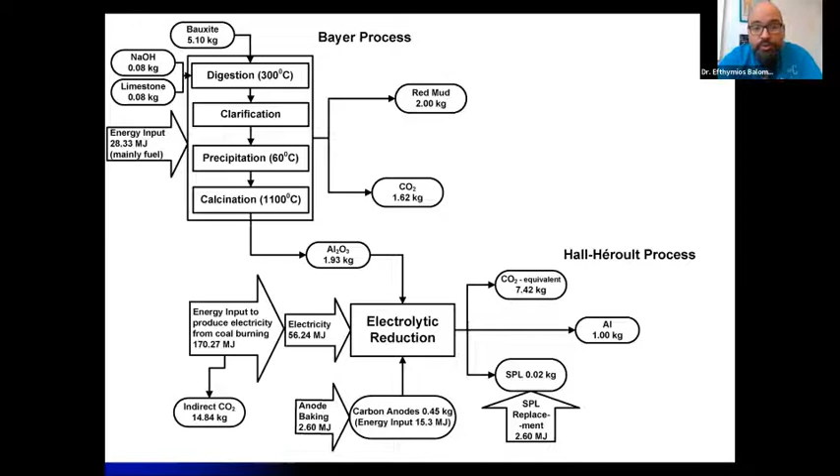So why Exergy in metallurgy? This is of the primary alumina and aluminum production. This is what we call a mass and energy diagram, and that's exactly what we have in this diagram, compare mass and energy - and this is a problem when you want to see how environmentally sustainable it is, because we don't compare energy. We have the process energy inputs, which is fuel, and we have the production process, electricity, which may be used again from non-renewable resources like coal burning, and therefore you cannot really judge what is the impact of this process.

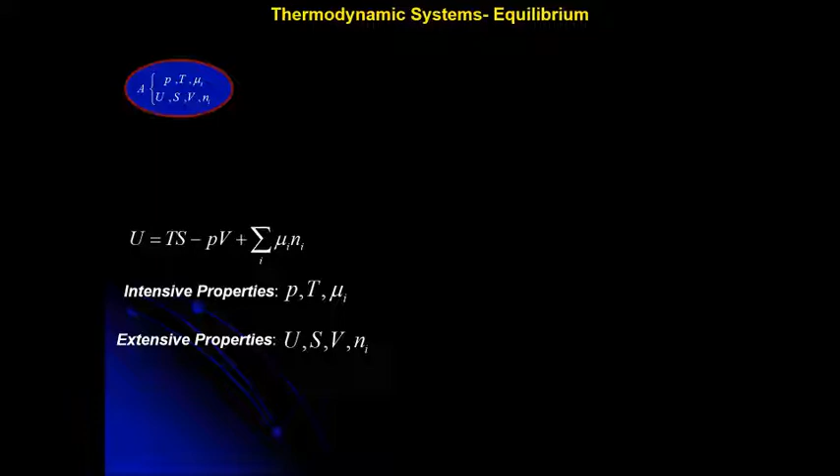So we go to thermodynamics. Some basic definitions I will go over. Thermodynamics defines a system which has some intensive properties like pressure, temperature, and chemical potential. It has some extensive properties like internal energy, entropy, volume, and number of moles.

This system is isolated from the environment - it has no interaction with the environment if it's isolated. If it's a closed system, it can exchange energy, but not matter, with the environment. And in the open system, it can exchange both energy and matter.

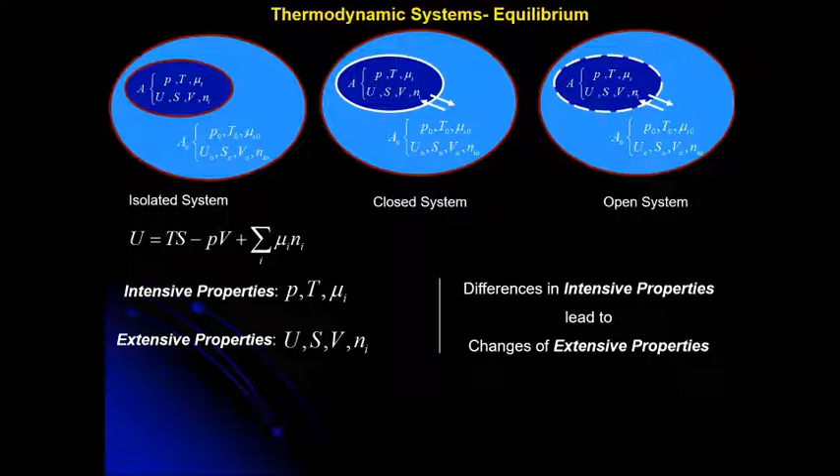So in these types of systems, when you have differences in intensive properties, this will lead to changes in extensive properties. This is a very simple idea - just imagine a balloon that has a different pressure from the environment, and this difference of pressures will lead the balloon to inflate or deflate. So these differences of intensive properties are thermodynamic forces that lead to thermodynamic fluxes, which lead eventually to thermodynamic equilibrium, where the balloon has now the same pressure as the environment.

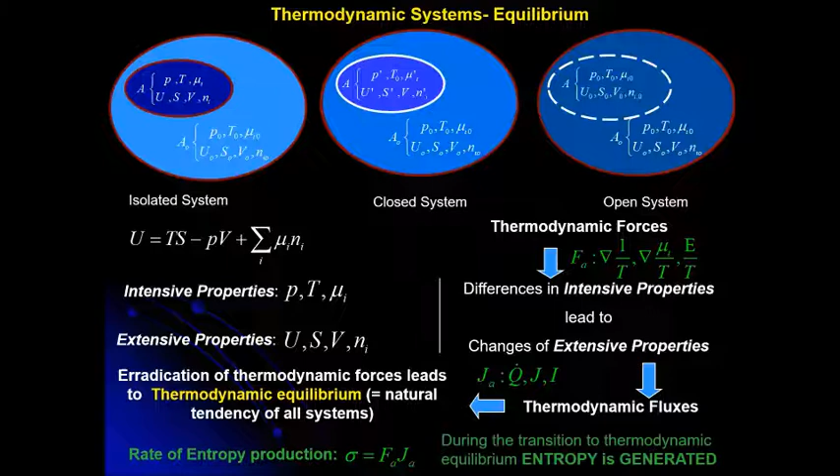And we can put some mathematics on these concepts, and you can see that forces, when they are multiplied by the corresponding fluxes, actually give us the rate of entropy production in the system. So as we transition to thermodynamic equilibrium, entropy is being generated.

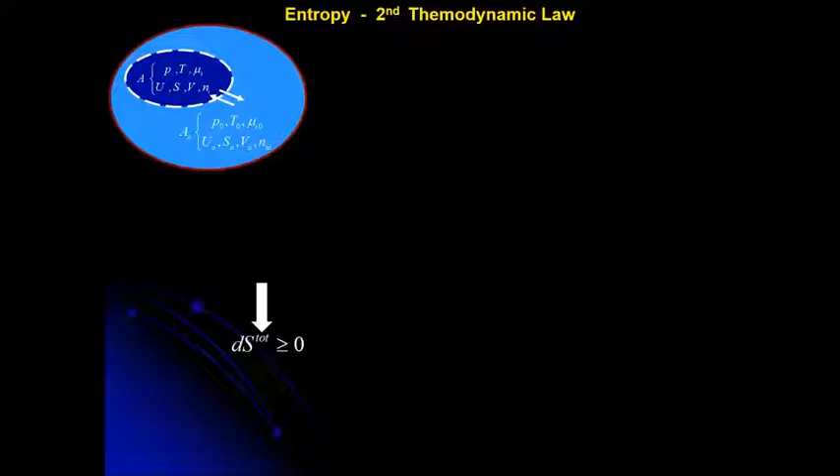Most likely, everybody knows the second thermodynamic law that says that entropy in an isolated system must always increase in every non-reversible process. But what does that really mean? What does entropy stand for? If you take a textbook, you will see that it's related with the number of states, microscopic quantum states, that the system exists in, which are the macroscopically equivalent states.

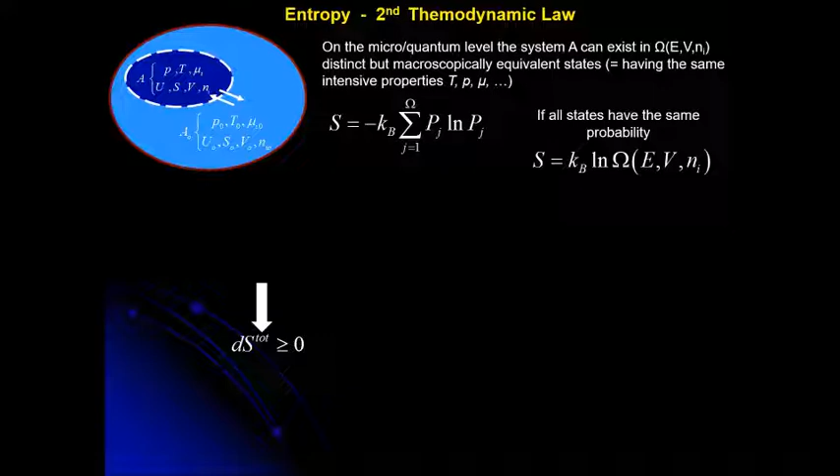So the molecules inside the blue balloon have many configurations, but no matter the configuration, they end up having the same temperatures, pressures, potential, and so on. So entropy is defined by this formula here, and if we show that all the states have the same ability to materialize, then this is further simplified to this formula, and we can now see that we will maximize the entropy of the system when we need the maximum amount of information. The system in this case will be in complete randomness or in full disorder.

So the second thermodynamic law states that all isolated systems will tend to maximize the number of macroscopically equivalent states, meaning that we will increase the information needed to describe the system. The system will be configured in such a way that it can exist in the most possible ways. When we have just one possible state of the system, then we have the absolute order, meaning that we need the minimum information for this description, and it goes to zero.

In fact, the capacity to store information within a system is a measure of its order and structure. So this goes a bit towards another branch of Exergy, which relates to information capacity, which is actually measured in bits. So entropy can be related to information. This is not so important for what we want to see here. What is important is this attribute, which is called negentropy, which is the distance between the entropy versus the entropy of the system at equilibrium. So we will see this in the next slides.

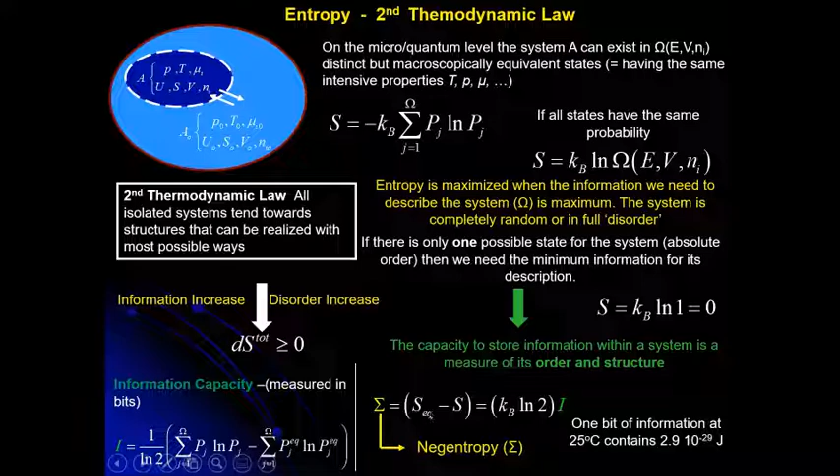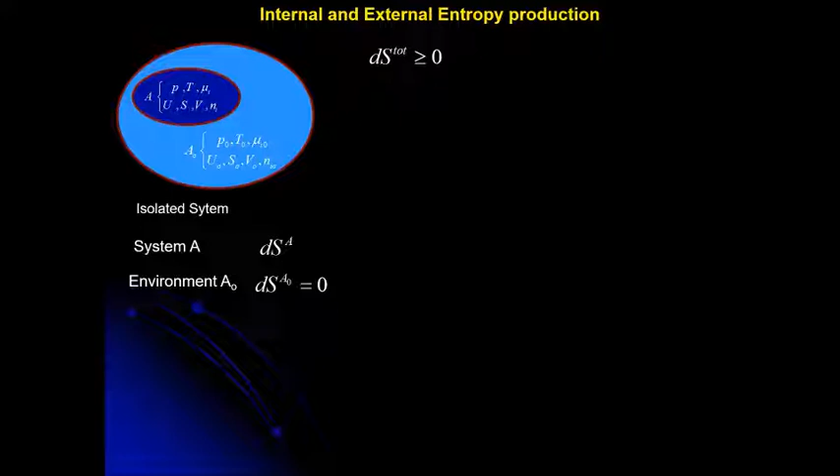Final thing that we need to clarify before Exergy is that entropy production must be defined as internal and external production. So we have something happening within system A. This causes a change in entropy, but since the system is isolated, you have no change in the entropy of the environment. So according to the second thermodynamic law, obviously the change in the system has to be positive. In the open system, imagine that something happens in the system and there's a change of entropy. One part of it stays within the system and the other part of it is exchanged with the environment. So that's internal and external changes of entropy.

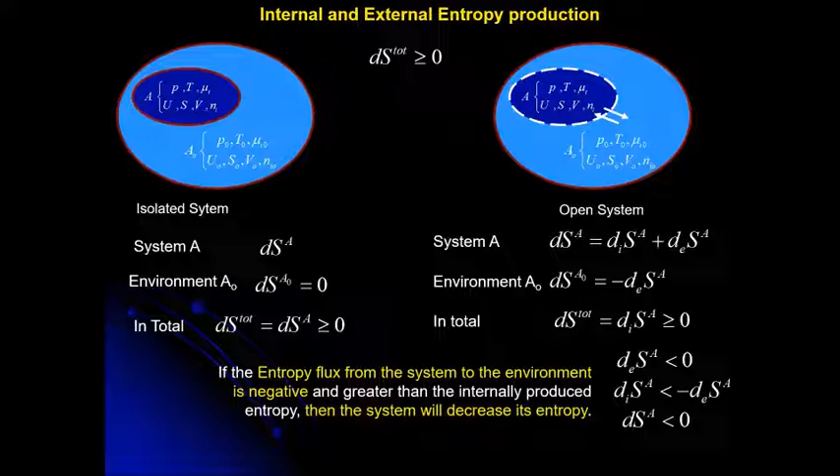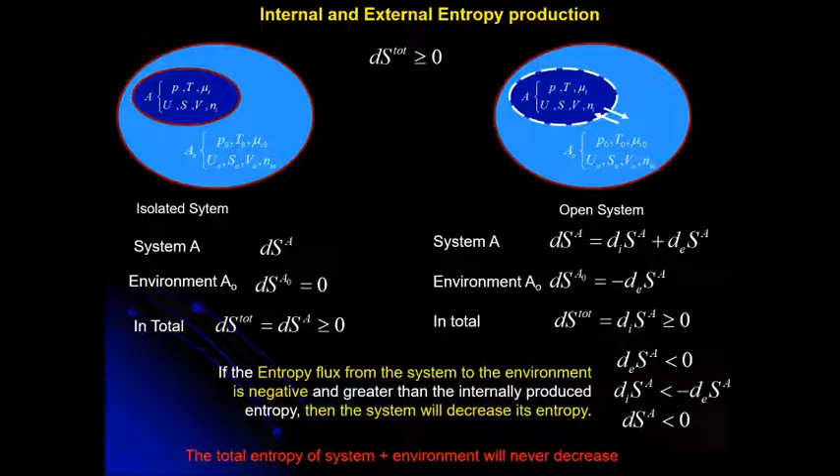Obviously, the environment undergoes the opposite of the external entropy change. And then if we go again for the total change in entropy between system and environment, we see that what needs to be positive is the internal change of entropy in the system. This means that we can have an entropy flux from the system to the environment that is negative, and in fact it could be even greater than the internal change in the system. Then the system will decrease its entropy. This is what happens when you put something warm in your refrigerator. The entropy of the refrigerator will decrease. However, the total entropy of the system and the environment will never decrease. In total, the entropy of environment and system will always increase.

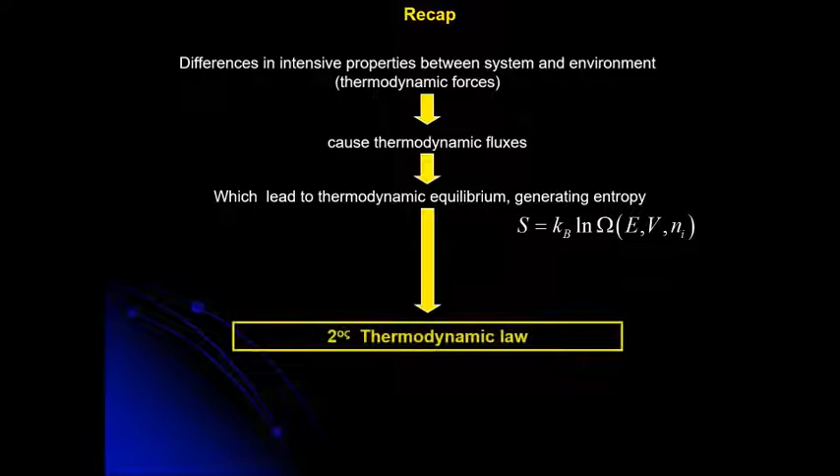So, very fast recap, because thermodynamics is always a bit of a complicated subject. When we have differences in intensive properties between system and environment, we have thermodynamic forces. These forces cause fluxes, and these fluxes will lead us to thermodynamic equilibrium, generating entropy along the way. According to the second thermodynamic law, all systems will tend naturally to achieve thermodynamic equilibrium, and the total entropy of the system and the environment will always increase. And entropy is somehow related to the information needed to describe the system. These are the basic things you should keep in mind for the next slides.

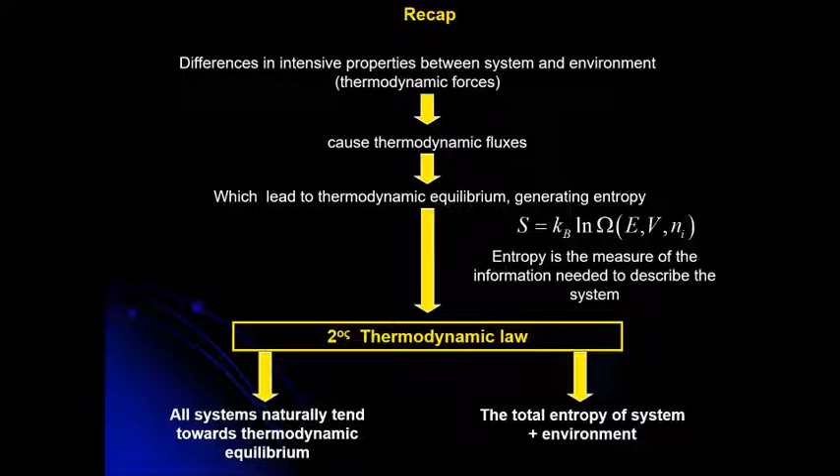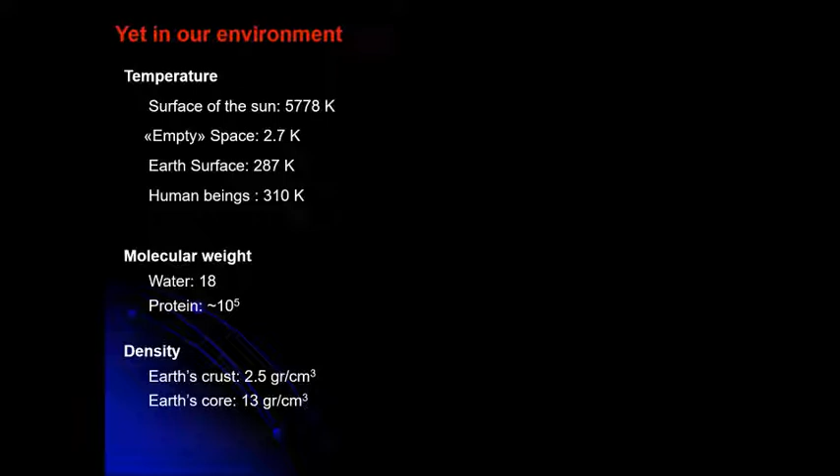So, despite this natural tendency for equilibrium, our environment, our universe is far from equilibrium. So we have a sun that has almost 6,000 degrees at its surface. At the same time, Earth's surface is at 15 degrees. The space surrounding us and the sun is at 2.7 Kelvin, and humans have a temperature of 36 degrees Celsius. Molecular weight between organic and inorganic matter differs significantly. Density between the upper parts of the crust and the lower parts and the core of the Earth is hugely different.

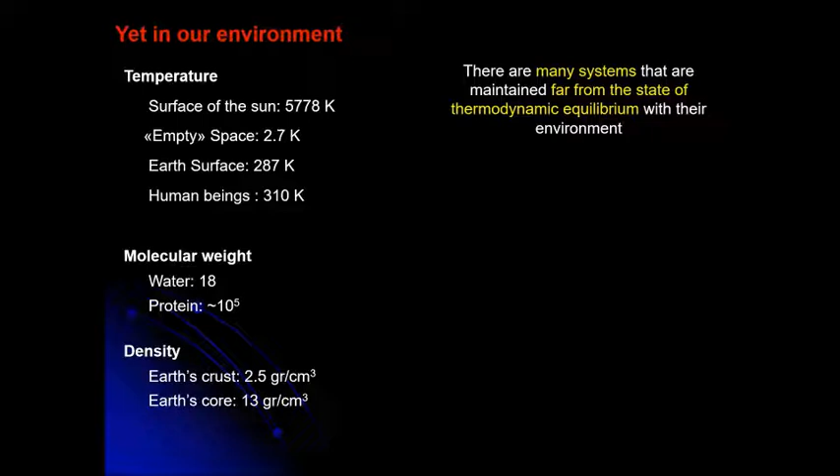So we have a lot of systems around us that are far from the state of thermodynamic equilibrium with their environment. These systems are called energy dissipative structures, which means they have the ability to remain far from equilibrium by the constant consumption of external energy and matter. This is, for example, how our bodies are kept warm and we don't come into thermodynamic equilibrium with the environment. We keep eating, and therefore we keep breathing.

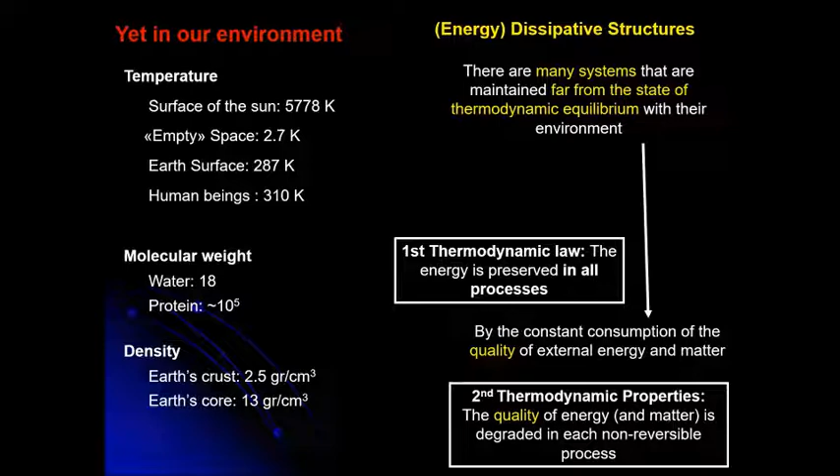But of course, this statement is false, because energy and matter are preserved in all processes. Therefore, we are not consuming energy and matter. We are constantly consuming the quality of external energy and matter. So what's happening is that we are degrading the quality of energy and matter that we are consuming.

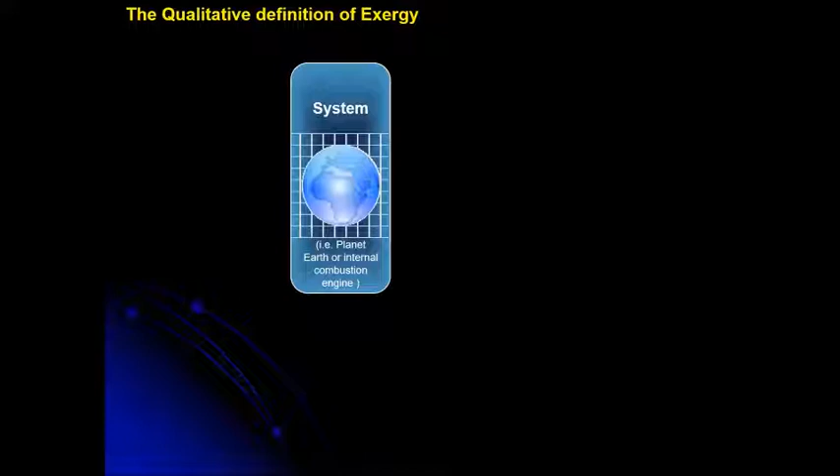Let's imagine a system, let's say planet Earth or an internal combustion engine of your car. These systems take as input energy and matter. So it could be solar radiation coming, shortwave electromagnetic radiation, or it could be gas in the car. And they are able to keep going, right?

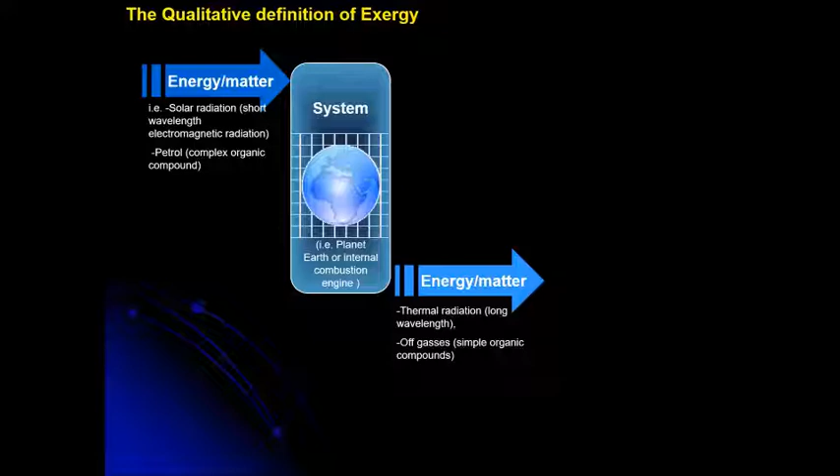But at the same time, they are rejecting energy and matter in terms of thermal radiation or off gases, and so on. So what is happening is that we're giving energy and matter with high quality, and we are rejecting energy and matter with low quality. The measure of this quality is called exergy, and exergy is measured in energy units.

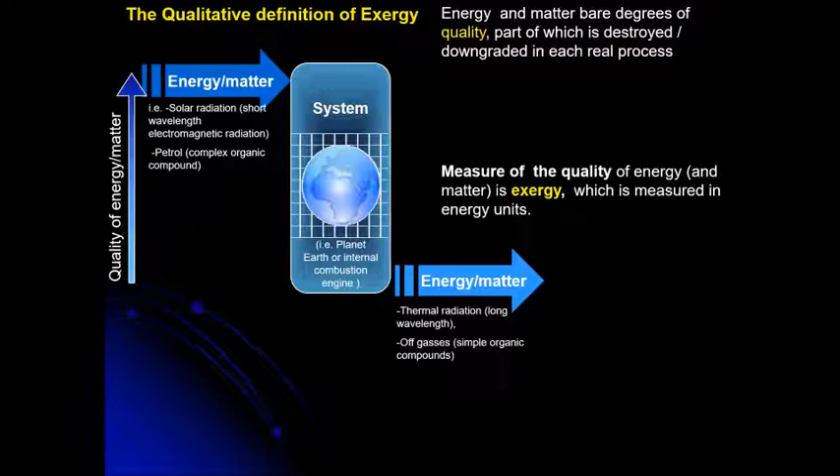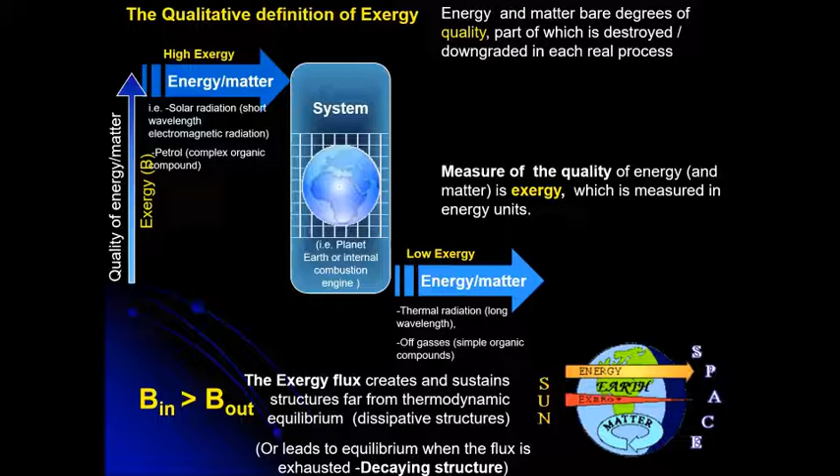So whenever we have an exergy flux, this can create and sustain the structures away from thermodynamic equilibrium, and these are the dissipative structures, like our planet. Or it can lead to equilibrium when the flux is exhausted and we have a decaying structure. But always exergy is being destroyed. We have higher exergy coming in, lower exergy coming out.

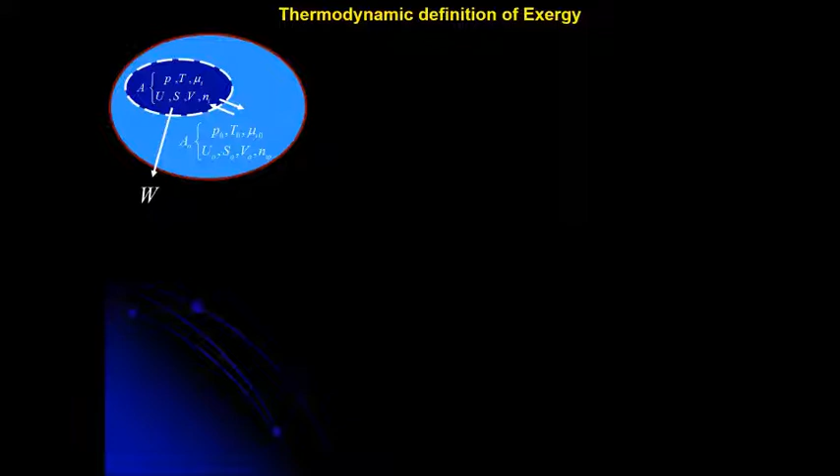So how do we define exergy? That was the concept, but how do we define it? The system interacts with the environment. It can be exerting a work, and then you have some very simple definitions between the system and the environment. I will not give too much time to the math here, but by doing some simple calculations, you derive that this parenthesis here can be called the change in exergy, right?

And so exergy is the difference of the internal energy of the system with the intensive properties of the environment times the extensive properties of the system. So it's the temperature of the environment times the entropy of the system, the pressure of the environment times the volume of the system, and so on.

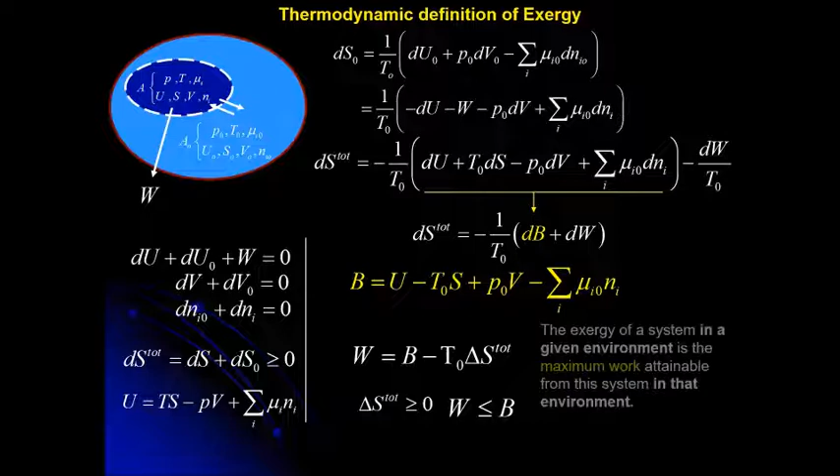And the work that we can exert from the system is, from this definition, the exergy minus the temperature times the total entropy production during this work production. And since the entropy change will always be non-negative, then the work can only be less or equal to exergy. Therefore, exergy is the maximum attainable work in any system in a given environment, right?

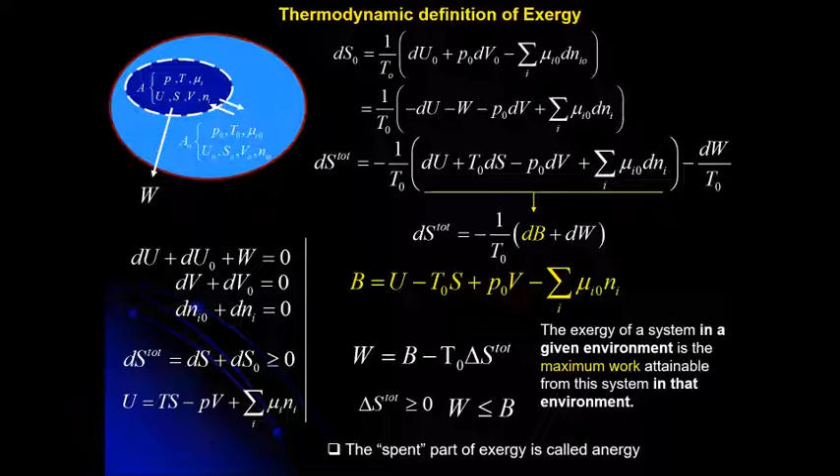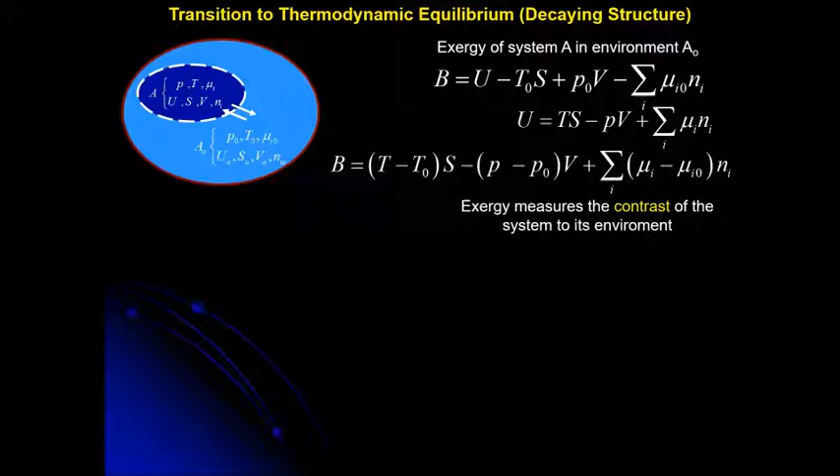The rest of the internal energy of the system is called anergy. It is what we can never use. So the exergy of a system in relation to the environment, we have defined it with this formula. Now, it's easy if we substitute the internal energy to see the exergy even clearer as the difference between the intensive properties between environment and system. So exergy measures the contrast of the system to the environment.

As we move towards thermodynamic equilibrium, where the intensive properties will all be the same, we have a change of entropy, which has to be greater than 0, and we have an exergy present in the initial state, but in the end, when we get to thermodynamic equilibrium, we have 0 exergy. During this transition, we assume that there was no work produced. Therefore, the total change of entropy is related directly to the change of exergy.

And again, here we can find the term of negentropy, which is easier to realize as the total entropy of the system now versus the total entropy of the system when it reaches equilibrium. How much entropy has to be generated to get to equilibrium. So exergy and negentropy measure the quality or the divergence or the excess of information of a system in relation to its environment.

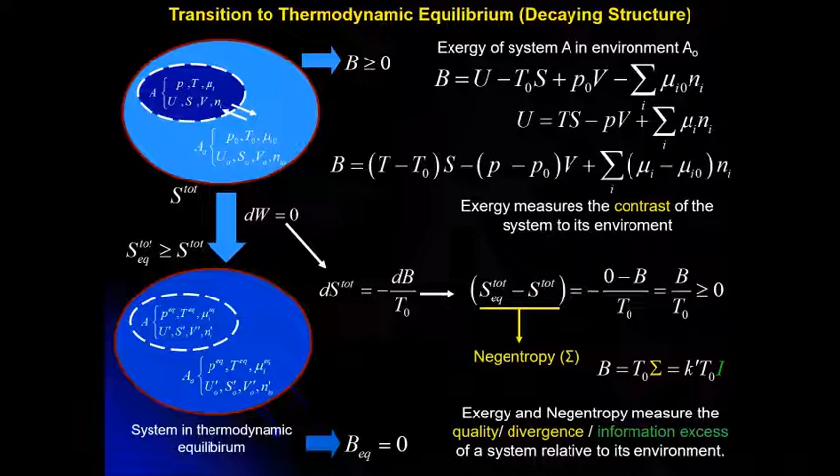So in many subcases, actually, exergy has already been defined in thermodynamics. What do I mean by this? So if we get a system where we have no change of number of moles, and pressure the same as the environment, practically the change in exergy equals the change of the Gibbs free energy.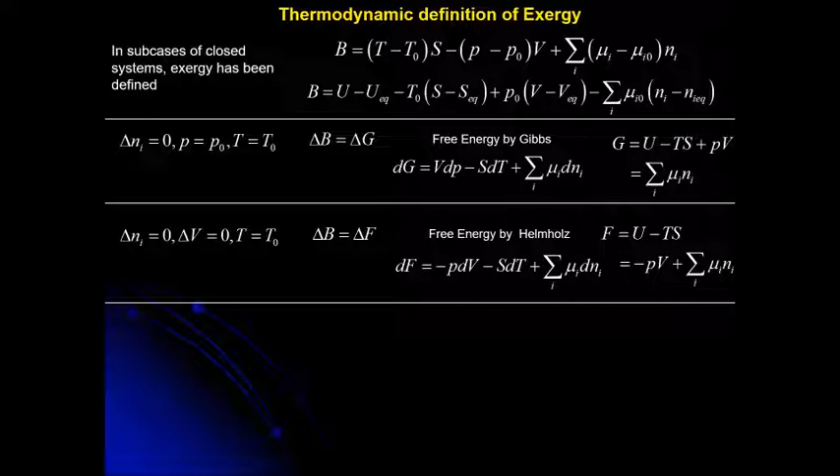Similarly, if we take a system where we have no change in volume and the temperature is equal to the temperature of the environment, exergy is related to the Helmholtz free energy, and similarly to enthalpy when you have no change in entropy. So practically, exergy is the quantity which thermodynamics initially seeks to define.

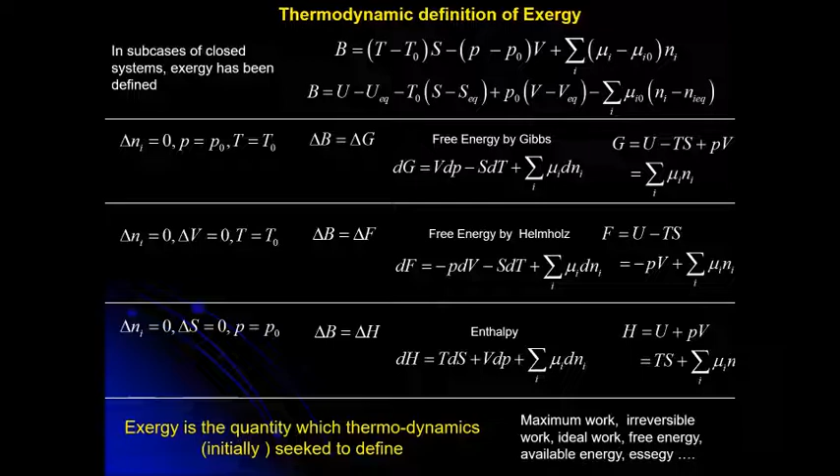And when I'm saying initially, I mean back in the days of Carnot, thermodynamics was looking to define what is the maximum work or the reversible work or the ideal work. And then we got more and more terms like free energy, available energy, exergy, and so on.

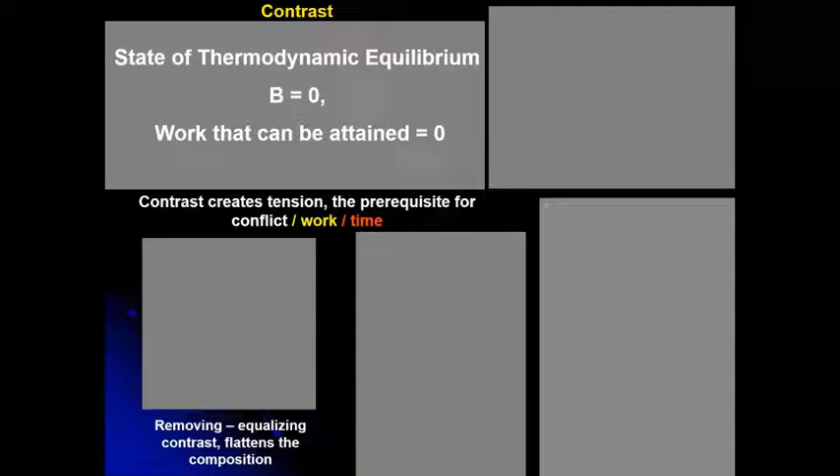Now, all these paintings, if we're discussing exergy, are at the state of thermodynamic equilibrium. Exergy is 0, and we can get no work or money for these paintings. This is called the dead state. It's where the intensive properties of the system are now defined by the environment. When your temperature is the same as the temperature of Earth, you're usually dead.

Dissipative structures consume exergy to maintain these contrasts to the environment so they can live, so they can produce work. In metallurgy, we have reactors that we need to spend a lot of exergy to maintain at conditions that are far from the environment, in strong contrast to the environment, in order to produce our chemical work, so to produce molten metals, for example. So exergy is a concept that allows us to visualize process efficiency in reference to the environment. And this is how it becomes relevant to ecology.

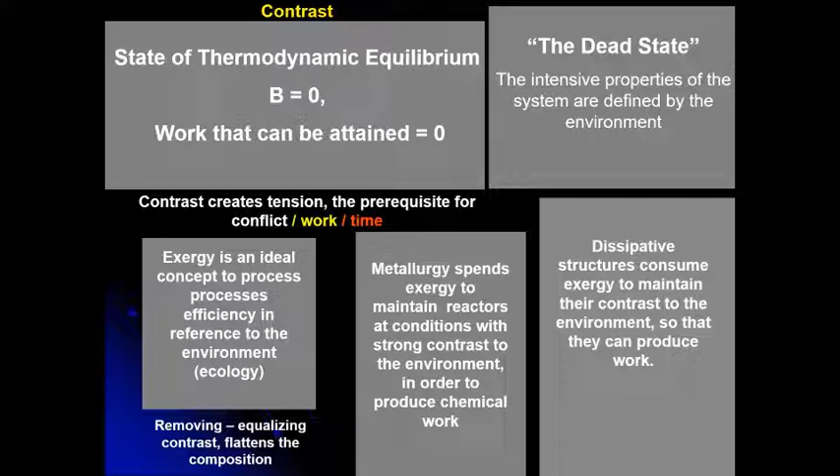When we want to understand better what's the difference between energy and exergy, first, they're both coming from Greek words. Energy is the work within, exergy is the work outside. Energy is motion or potential for motion, while exergy is work or potential for work. And if you want to be simple about it, work can be more organized motion. Energy is always preserved, while exergy is only preserved in reversible theoretical processes. Energy is always greater than 0. Exergy becomes 0 at thermodynamic equilibrium.

Energy is independent of the environment, while exergy is defined by the environment. Energy is quantitative, so you know how much energy you have. Exergy is kind of qualitative because it's always relating to the environment. And the various forms of energy have different degrees of quality, or let's say, of how much of it can be transformed into another form of energy under the process. So we have potential or kinetic or electric or magnetic energy in my system. In ideal conditions, so without any heat losses and friction and so on, you can change from one energy to another without losing any work.

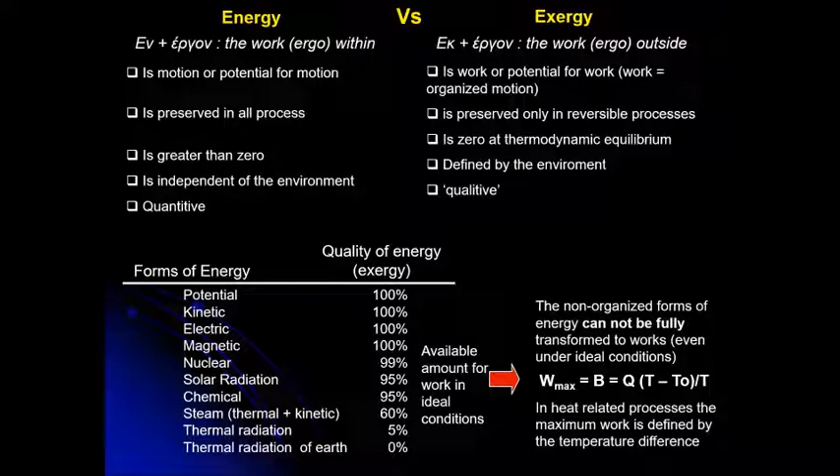But when you get to the more disordered forms of energies, like nuclear, like solar radiation, like chemical, like steam, like low-level thermal radiation or thermal radiation of our planet, the quality of exergy, the work that you can attain, drops significantly. These numbers are just indicative, of course. So non-organized forms of energy cannot be fully transformed to work, even under ideal conditions. And this is where we go back to Carnot, and you can see that the maximum work attainable in this cycle is, of course, equal to exergy. And whenever we have heat-related processes in transformation of energy, the maximum work is always defined by the temperature difference between the system and the low reservoir or the environment.

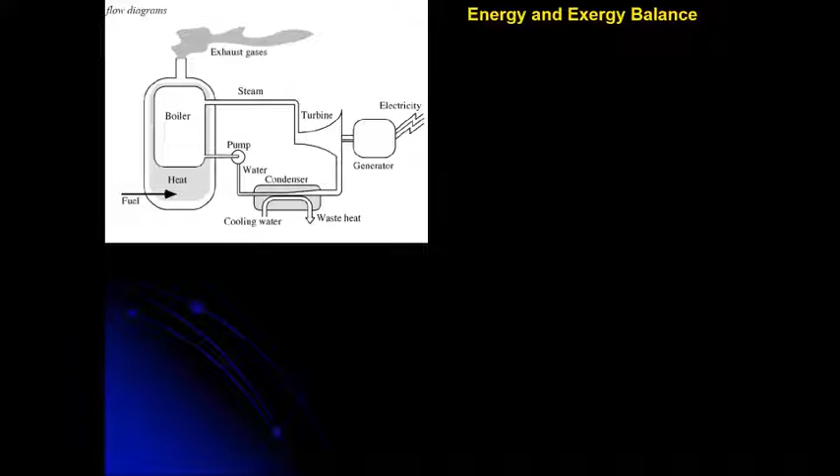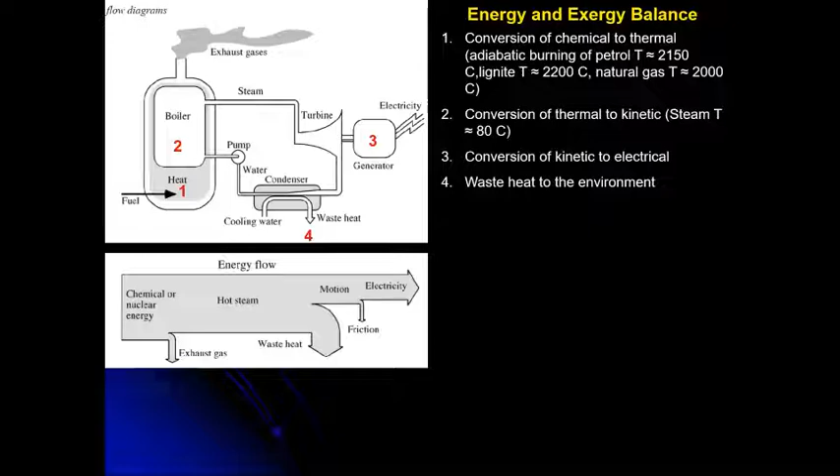So let's see one final example of how exergy was firstly used in mechanical engineering applications. This is a simple schematic of an electric power plant. I'm producing energy by boiling water, producing steam. The steam rotates a turbine, you produce electricity, then the steam is condensed and re-enters the boiler system. Conversion of chemical energy to thermal energy by burning some sort of fossil fuel, then conversion of thermal energy to kinetic energy by generating steam, conversion of kinetic energy to electrical energy, and waste heat to water. If you use energy flow, you see that the major energy loss is at the condenser.

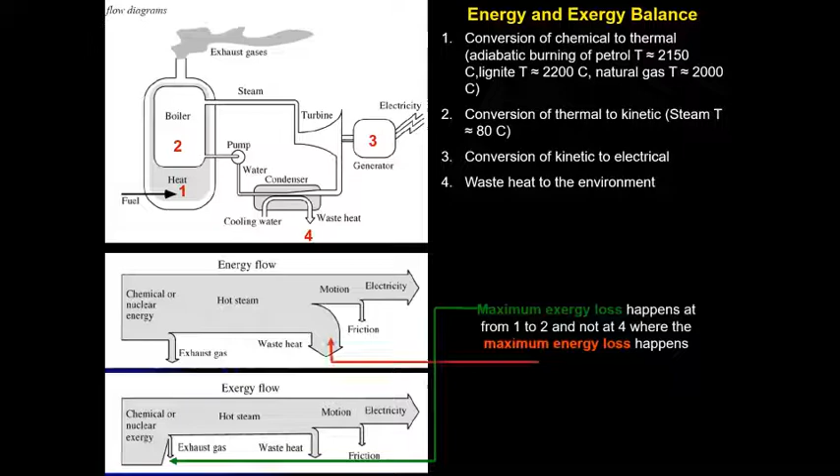But if you see exergy flow for the system, you will see that the major exergy loss happens at number 1. This is exactly where the exergy balance can provide new insight to a process, because the energy balance does not provide us any information on what's the potential of the energy we're discussing to produce work, right? So by looking at the exergy system, we can now see that if we want to optimize our power plant, we should not invest more in waste heat recovery at the condenser where the steam is at 80 or less degrees, but we should spend more time to optimize the transfer between 1 and 2. And this has actually taken place.

Supercritical boilers have improved the overall exergy that we can pump into the steam, and this is what is used today. And if you want to go a step further, then maybe you can say that, okay, I don't want to be burning something to boil water. It's better that I convert directly the chemical energy of my fuel to electrical energy using a solid oxide fuel cell, and so on.

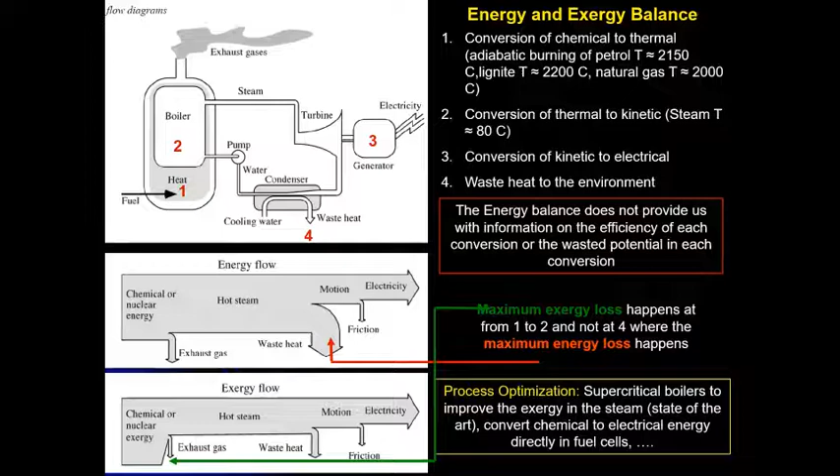So we go now to the metallurgical part, which is the chemical exergy. The chemical exergy is this final component in this equation. You can see here. So it's the difference between the chemical potential of the system and the chemical potential of its constituent in the system versus the chemical potential of this same compound in the environment.

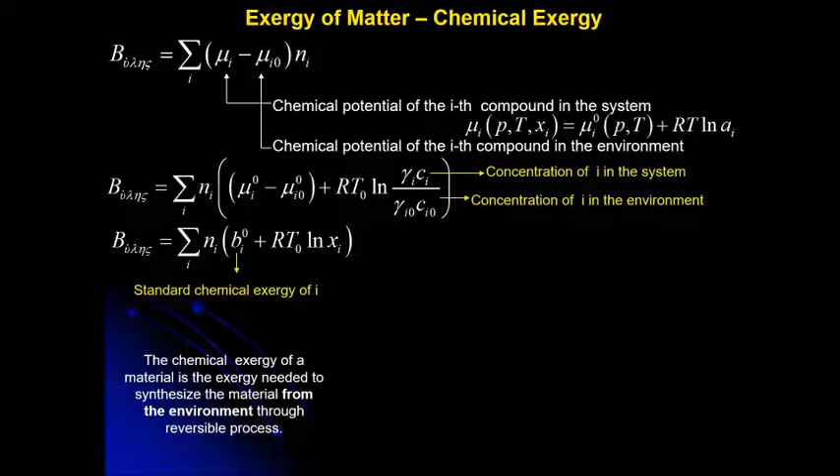You end up with this formula where Ci is the concentration in the system and Ci0 is the concentration of the same element in the environment. And we can then take this, simplify this a bit, and define the standard chemical exergy of the i component. So the chemical exergy of a material is the exergy needed to synthesize the material from the environment under reversible processes.

Similarly to what we saw before with energies, we can again have in our minds that we have materials that are high in exergy, that are well structured, or are super pure, and we have the highest degree of exergy, and they need a lot of exergy to be created, or they can release a lot of exergy upon their destruction. But as our products become less and less pure, their exergy diminishes.

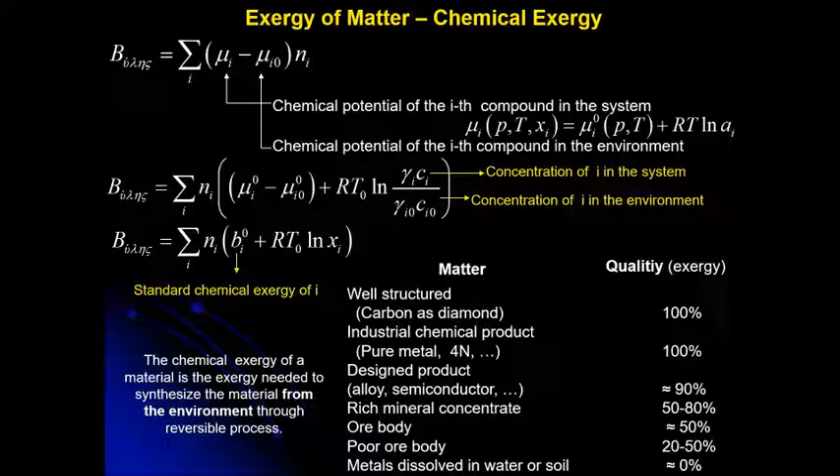So a rich mineral concentrate might have significant exergy. A poor ore body has less. A metal that is dissolved in water and soil has zero exergy because it's practically in equilibrium with the environment. Let's show a reaction.

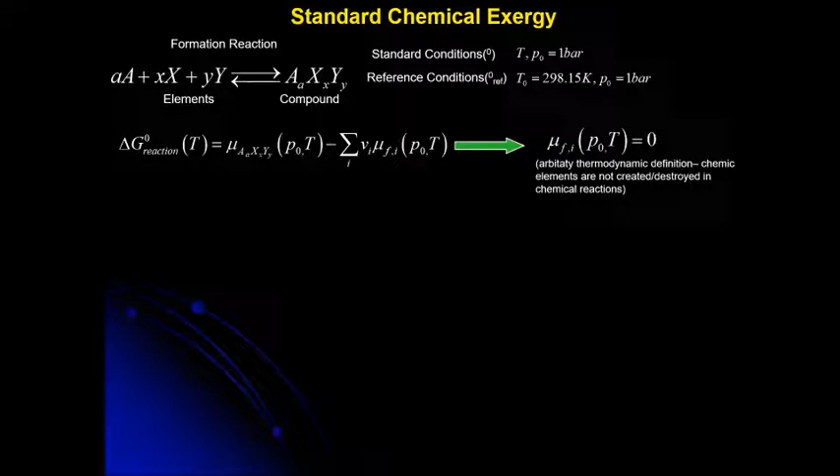The elements that this contains, and thermodynamics has defined the formation of this reaction by its formula. And thermodynamics says that the chemical potential of its element... so we say that elements cannot be created or destroyed in chemical reaction, therefore we define all the chemical potentials of the elements as zero.

This allows us to be able to calculate the free energy change of reaction through the standard Gibbs free energy information, which is determined experimentally, and this allows us most of the thermodynamic modeling.

So let's try to see how we can do this using exergy. The same idea here, but instead of delta G, we go with delta B. And this time, we say that the elements are not in equilibrium with the environment, because in the environment, they are not found as pure elements, and therefore their standard exergy cannot be 0.

But if we go under constant temperature and pressure, as we said before, the delta G can be equal to delta B, and therefore we can have this formula by which we can define the standard chemical exergy of a compound in relation to the Gibbs free energy of formation and the reference elemental exergy of its components.

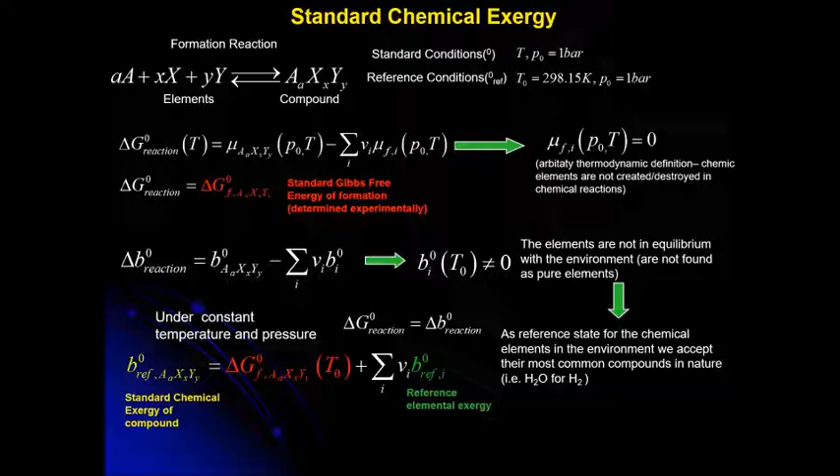So how will we define? What we need to define now is this green reference elemental exergy. Reference states for the chemical elements in their environments, we will accept their most common compounds in nature. So when we're discussing the reference elemental exergy of hydrogen, we will select water.

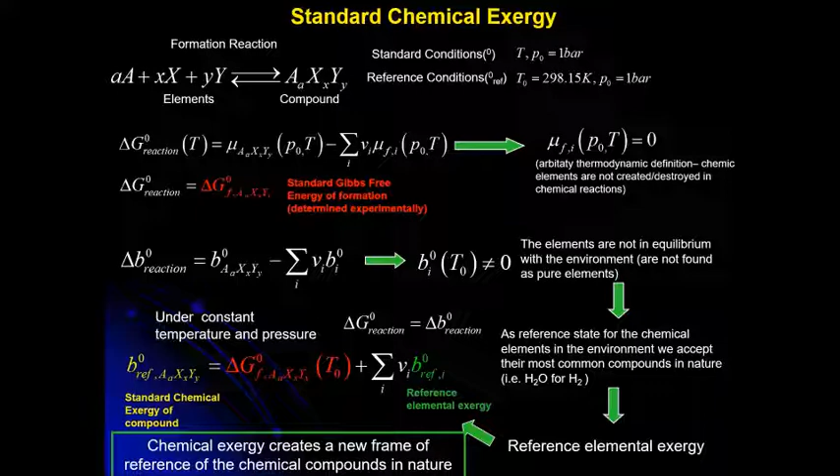So we frame chemical compounds in nature. So we define that the element in the environment has a reference state which corresponds to its most common compound, and that compound has an exergy of 0. So let's see an example.

Oxygen. The reference state is obviously O2 in the atmosphere. The concentration in the atmosphere is 20.4%. Therefore, the reference chemical exergy for O2 can be easily found to be 3.97 kilojoules per mole. If I go to iron now, the reference state would be, say, hematite in the earth crust.

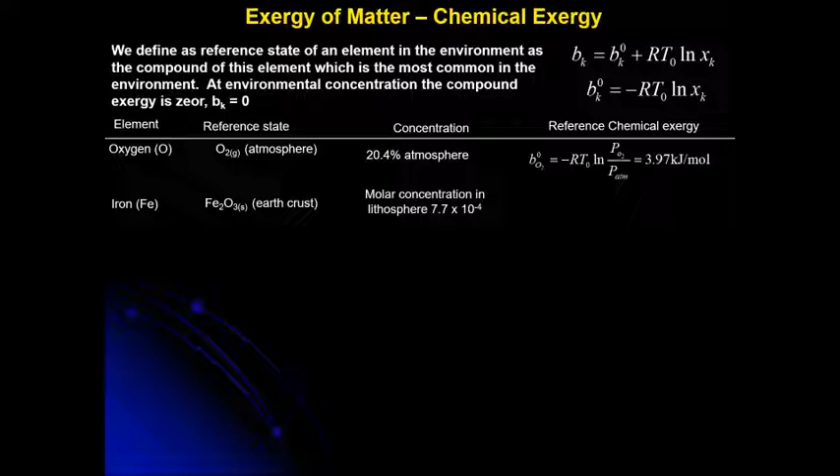We can go and use some average concentration and find that in the lithosphere, the hematite is found in this concentration, and then again use the same formula to calculate the reference chemical exergy of hematite. Knowing hematite and the formation of hematite, and the exergy of oxygen, we can derive the chemical exergy of iron.

And you can see this chemical exergy is 377 kilojoules per mole, and this is the exergy required if we want to extract metallic iron from hematite in the lithosphere under reversible processing. Similarly, we can keep going and find the chemical exergy of magnetite, wüstite.

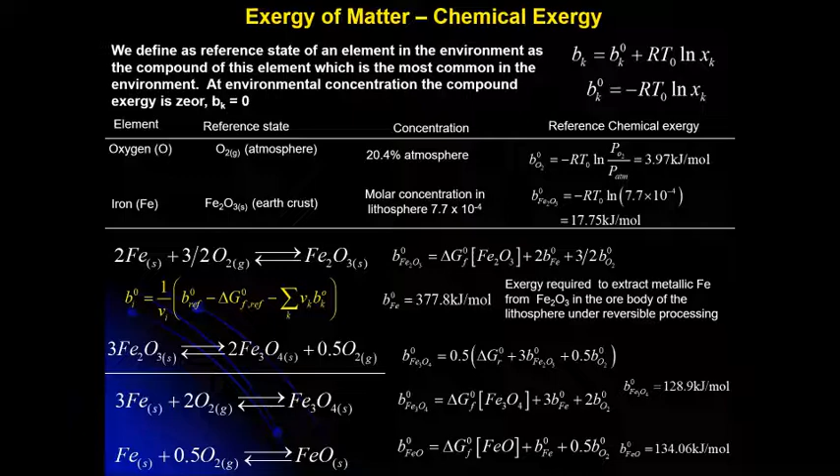So what we see here is the exergy for the iron oxide and metallic iron, and we can see that the oxidation state reduces. So as we see, exergy gives us a very clear picture of the quality of matter in our environment, which is highly oxidative. So it quantifies the matter around us in a more logical way, whereas the free energy of formation, which was our usual reference in classic thermodynamics, has little relevance. You can see that the numbers are really arbitrary.

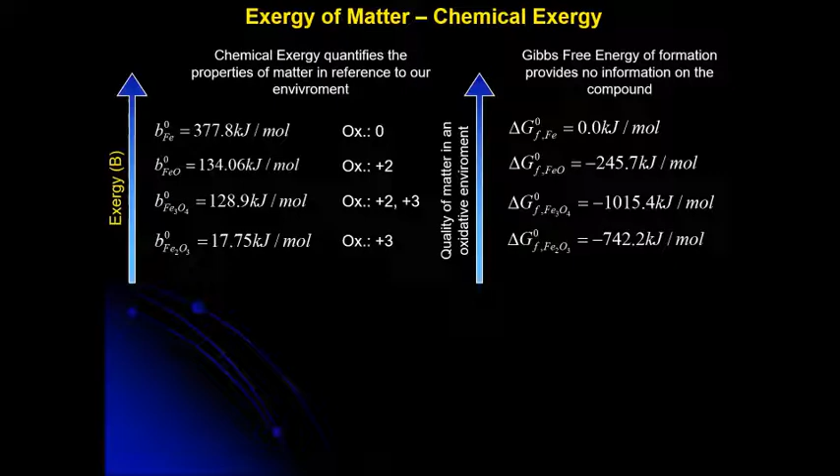Plus, we now know that the production of metallic iron from pure hematite requires so much energy under reversible processing, so 6,605 kilojoules per kilogram, and we can directly relate this to how much the modern day production of iron consumes energy. Of course, it's under reversible processing.

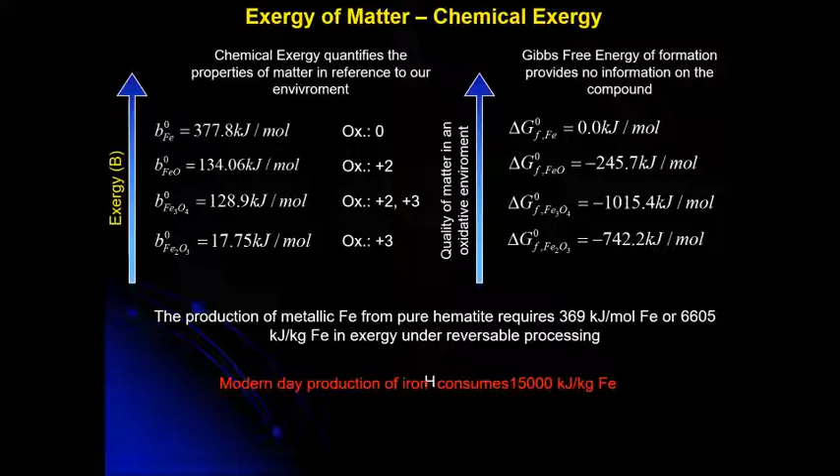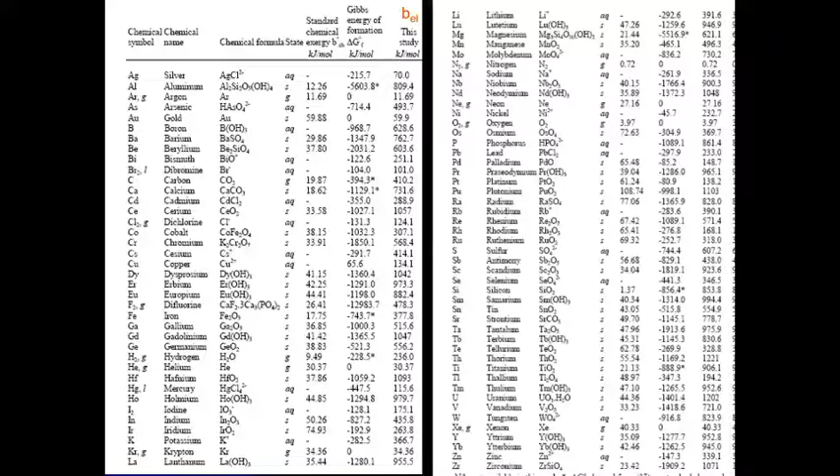Of course, all this you find in reference books, you don't need to start doing all this work from the beginning. You can go directly to this type of chart and find the elemental exergy of each element.

So, the higher the chemical exergy, the more rare is this element in the environment, and the more valuable it is as a resource. We can imagine the process happening in nature on the left.

So we have sunlight coming into our planet. We have various reactions taking place in the biosphere, in the atmosphere and in the hydrosphere, and through all these processes, there are some wastes being created. They are decomposed and they go into the lithosphere or the hydrosphere.

Similarly, in our social sphere, in what humans do to the planet, we usually extract minerals and deposits and resources from the lithosphere and the hydrosphere, and we go into production, consumption, and the waste is returned back into these spheres.

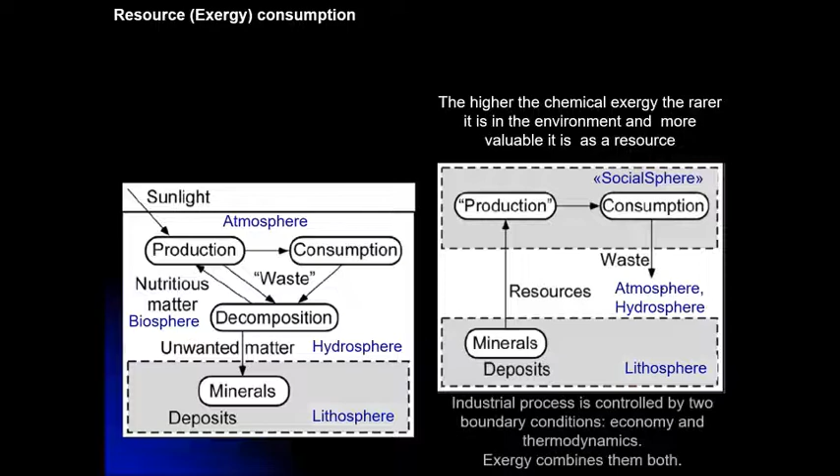So when we see these charts, if we change them into an exergy chart, we can have this picture. We have a huge exergy flow going into our little beaker here, which is the planet Earth. This exergy flow creates various substances found in mineral deposits, in forests, in farms, and so on. And our society is taking out exergy flows to be used for various productive purposes.

Therefore, it's clear that this process is only sustainable as long as we don't draw exergy faster than exergy is replenished. This, of course, is difficult to do on a planetary scale, but when we look into industrial processes, we can see that this is controlled basically by two boundary conditions. One is economy and the other is thermodynamics. And exergy has a way of combining them both.

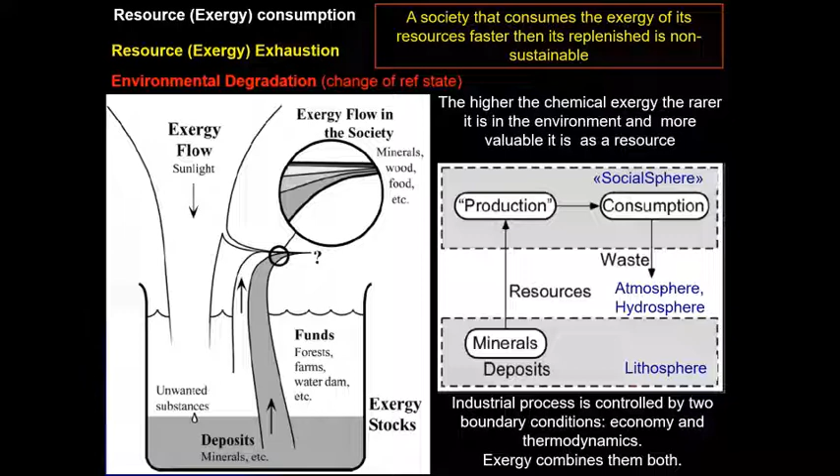Because now, for each product and byproduct we produce, we have a value that's comparable and defined. So if we want sustainable development, we need to satisfy the needs of the present without compromising the ability to satisfy the needs of the future.

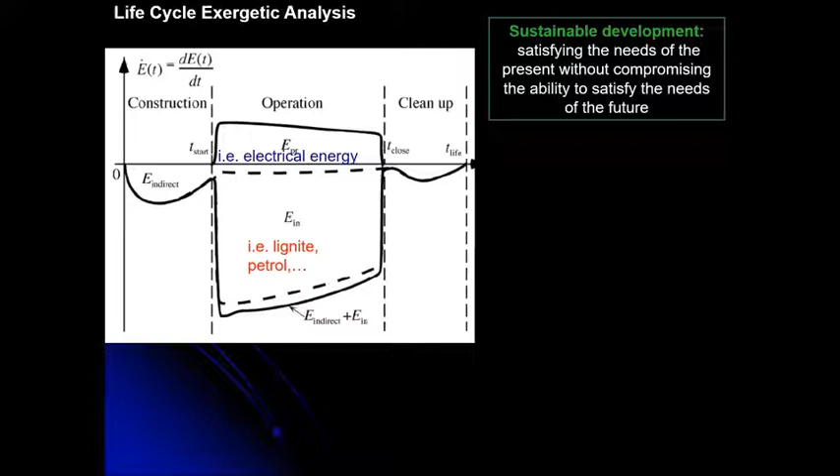If we are using renewable resources in our accounting, then the exergy coming in is considered free because this electricity can be renewed. And you can see that the same graph gives us a sense of at what time we will have produced enough exergy to have a bonus of exergy through the entire life cycle.

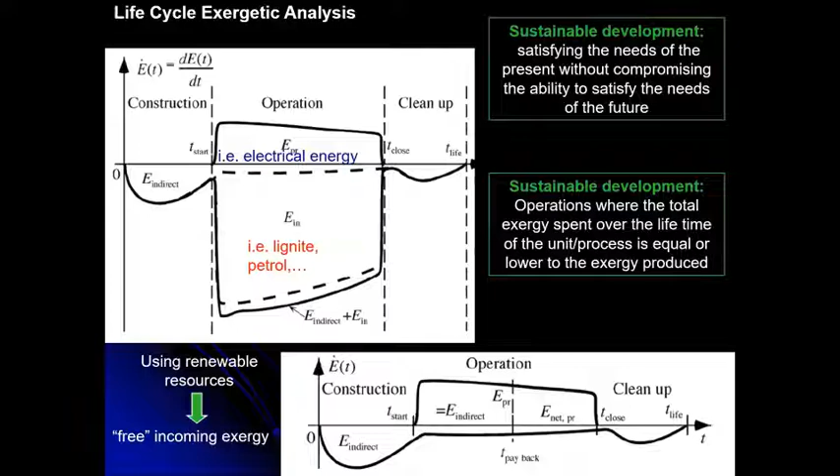So this is how sustainable development can take place with exergetic life cycle analysis. You need to have operations where the total exergy spent over the lifetime of the unit or process is equal to or lower than the exergy produced from this plant. And now reaching the exergy balance.

The exergy balance provides us information on optimizing thermodynamic processes. The exergy utilization coefficient of the process quantifies its inherent imperfection. It can be used to directly compare two different processes with the same product. It's very simple. We have the exergy of the useful product versus the exergy we spent in the process. This will always be smaller than 1 because exergy is always being destroyed.

Also, please note, we're only putting the product, not the byproducts. So therefore, this is a clear indication of how useful the exergy we spent was.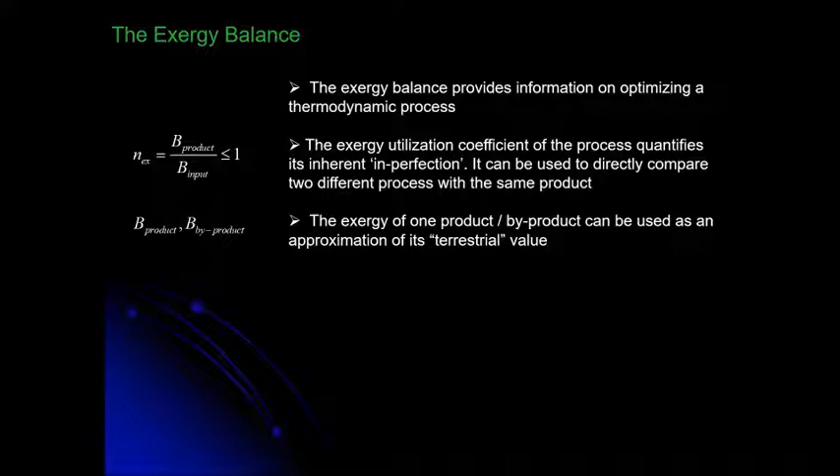The exergy of a product or its byproduct can also be used as an approximation of its market value. High exergy means that this is a rare chemical compound on the planet. It means that it stands very far from the environment. This can also be a bad thing. So, something toxic will also have a high exergy.

And finally, the total exergy consumption of non-renewable resources used in the production is the direct measure of its environmental cost. And this is, again, defined in energy units. So we put exergy into our plant, we take exergy out of the plant, and there is always a loss, which is tied to irreversible processing, and this loss is the direct measure of our environmental cost. So if we want the same product to be more sustainable, we need to minimize the exergetic losses.

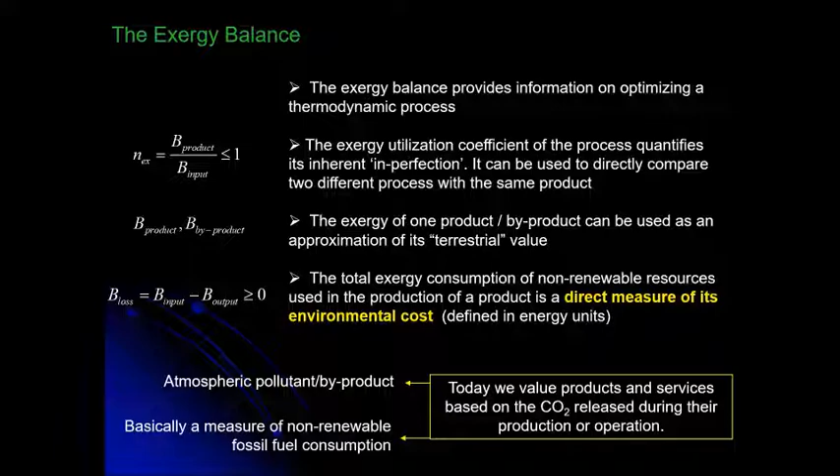Today, we are actually doing some sort of valuing of products and services, and we're using CO2 as the base for this measurement. CO2 is obviously an atmospheric pollutant and a byproduct of this process, but practically, it is a measure of non-renewable fossil fuel consumption. So we come back to the alumina and aluminum production.

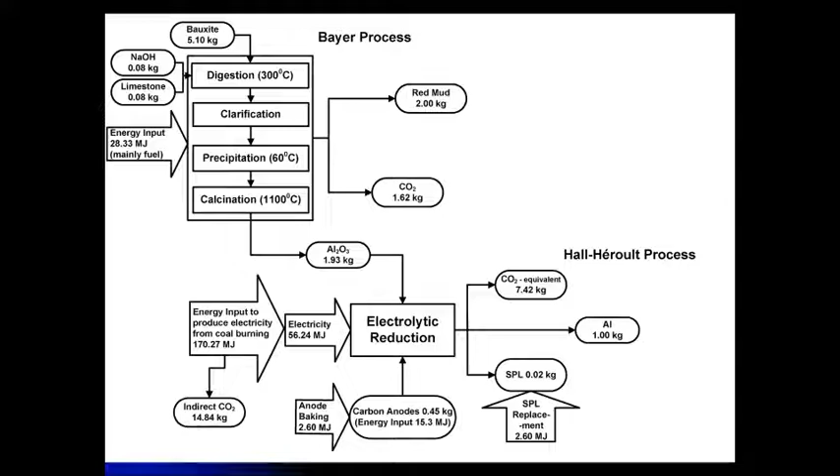We have this flow sheet, and now we will try to change this into an exergy balance. So we first identify the chemical elements that are involved in all the processes. It's a small list, and we take directly the exergy of each element from a table found in literature.

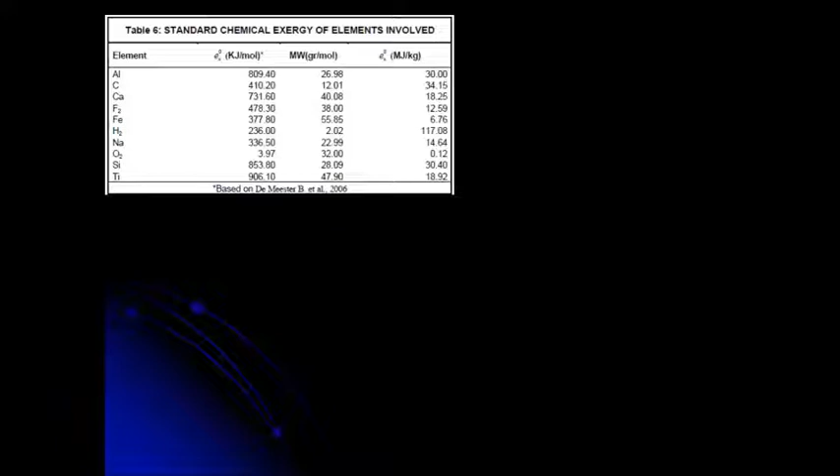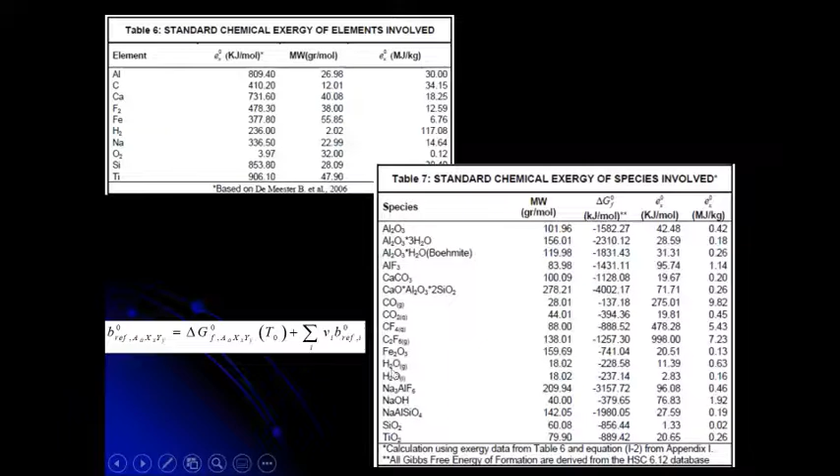Then we define the standard species involved in all our flow sheets, and we calculate the chemical exergy using a formula based on the chemical exergy of the elements. It's a very straightforward process. Of course, in these calculations, we will always need the free energy information for each of the species.

But also in our process, we will come up with minerals or complex byproducts like bauxite or red mud. How do we define the exergy in these cases? Well, then we go for the exergy of a mixture, which is defined by simply using the standard thermodynamic formulas for mixtures. In this case, we will assume that all our mixtures are ideal, and therefore we will use the formula you see above.

And simply by knowing the composition of our ore and defining how many grams we have of this species, we can calculate the exergy, or about 0.14 megajoules per kilogram of exergy.

The red mud bauxite residue coming out of the Bayer process as a waste contains mainly iron, titanium, complex compounds, and again we can assign exergy, finding that in fact it's a bit higher than the bauxite, which is fairly reasonable because bauxite ore uses very common compounds found in the environment, whereas the bauxite residue, the red mud, has much more soda and calcium inside of it, making it a bit higher in exergy value.

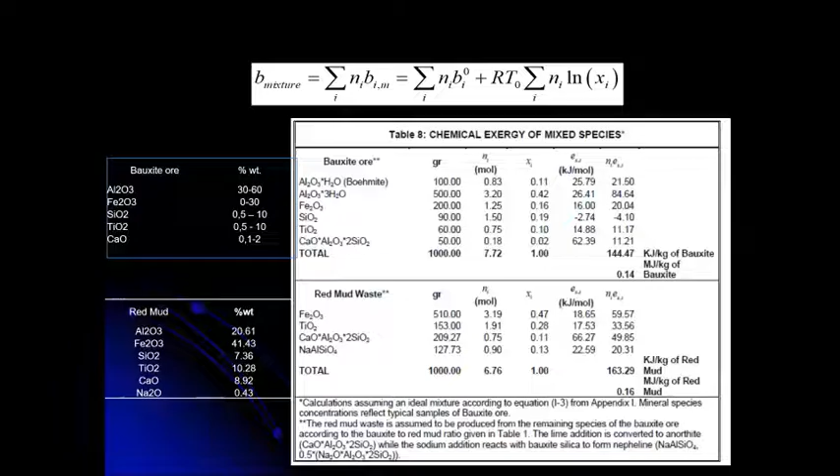So then we go back to the mass and energy balance. We now have large flows like bauxite, we just calculate the exergy per kilogram. Therefore, just by multiplying the mass to the exergy, you have the exergy component for each of these inputs. You have utilities coming in.

Let's say it's diesel fuel. Here, the chemical exergy of any fuel can be easily found by its higher heating value. Therefore, we calculate the utilities coming into the operation.

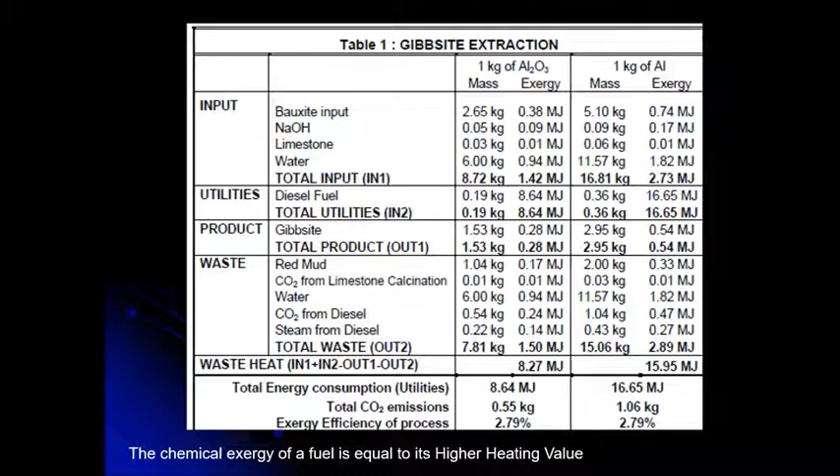We have a product, trihydrated alumina gibbsite. Again, we tie that to an exergy, and we have some waste streams or byproducts, which again we calculate here. So we can do the sum of these streams and end up with this exergy figure.

You see that the input in terms of materials has an exergy total of 1.16 megajoules. We add 28 megajoules in fuel utilities. We take out 0.81 megajoules as a product, the alumina product.

We lose exergy in our waste products, which is by CO2 and bauxite residue, and the rest, what is lost, is waste heat. This is the exergy that is destroyed in the process.

Now, if I do the exergy coefficient, it's very low because it's basically 0.81 divided by the sum of the utilities and the input, so something like 3%.

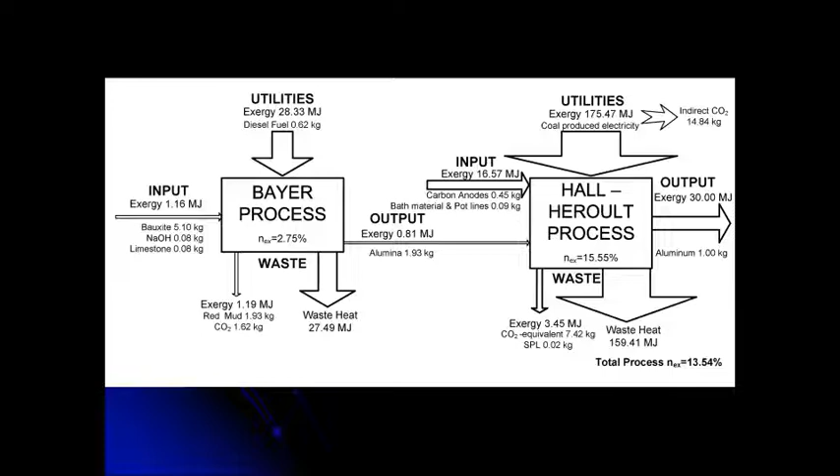And on the right, you see further on the Hall-Héroult process for producing aluminum. What you do with this type of modeling and this type of exergy calculations is that you can imagine how your system will be better if you take, for example, a byproduct.

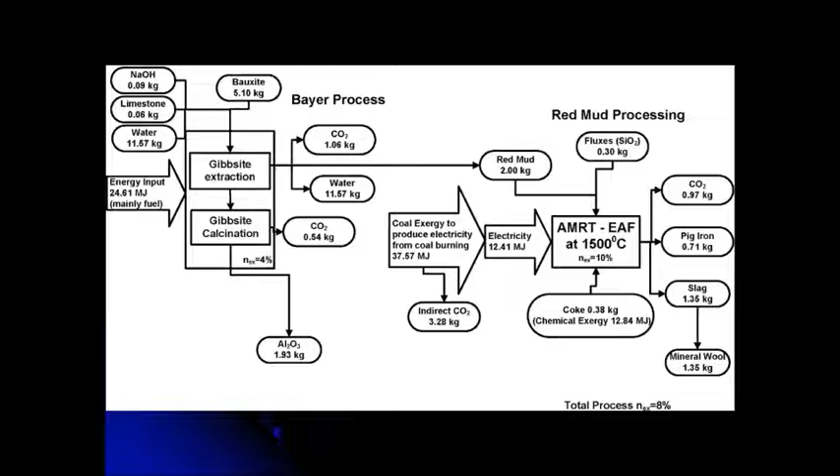Like red mud and try to utilize it, for example, in an EAF process. In this case, you see that the total exergy of the entire new system is doubled from what was like 3%, 4%, it's now going up to 8%. So this gives you a direct idea of whether taking bauxite residue and converting it into pig iron and mineral wool is a good idea in terms of sustainability.

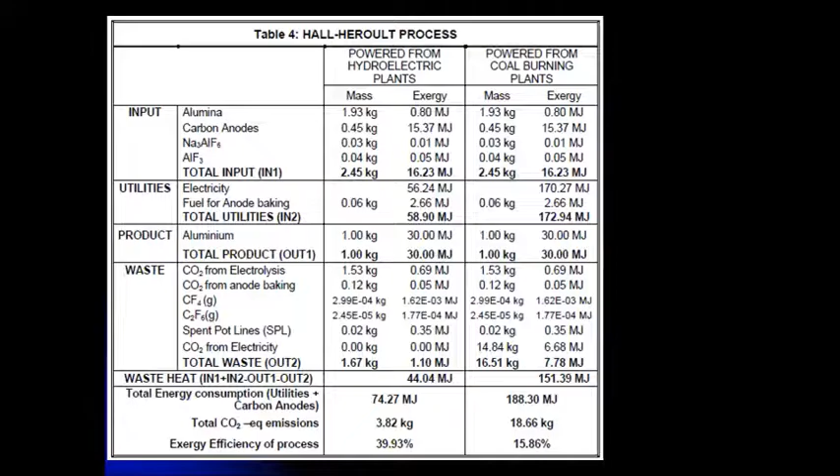This is of course theoretical, as this process has not been achieved to this degree. We assume that we get the same amounts of outputs in both cases.

So that is somewhere here the end of my lecture, and I can open the floor to any questions from the audience.

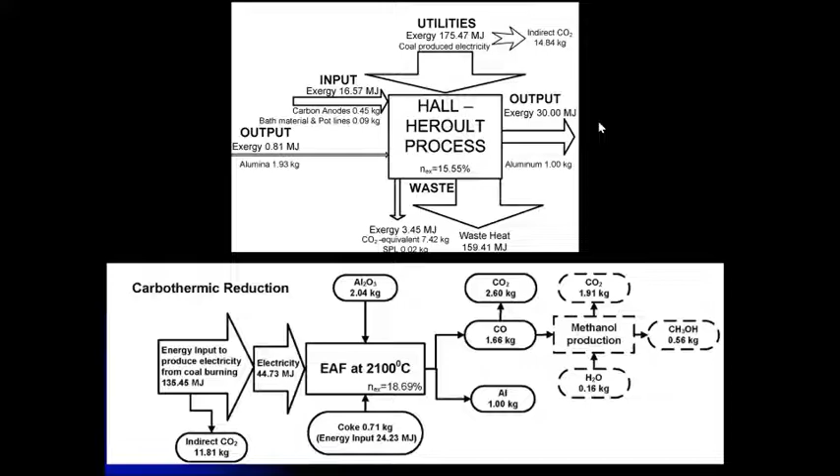There's a question from Ivan: Are there any benchmark values for the Exergy utilization coefficient? For example, if the efficiency is below 20%, then the process is inefficient, or can it only be used to compare between two options?

Interesting. No, there are not.

So there's a question from my side. I see you mentioned LCA alongside exergetic analysis. Do you normally do this? Do you collaborate a lot with people who work with conventional LCAs, or not? Is there any value in doing that?

Well, I have been to conferences where there's a huge debate between fans of exergetic life cycle analysis and those doing conventional life cycle analysis. Sometimes there's an academic dispute between these two groups, but I think you need to do both—they give you different types of information. From my side, Exergy is much more straightforward and thermodynamic than conventional life cycle analysis, where in the end you get figures about CO2 or eutrophication factor, numbers that are very difficult to comprehend. They're just numbers on a scale. So that's the big difference.